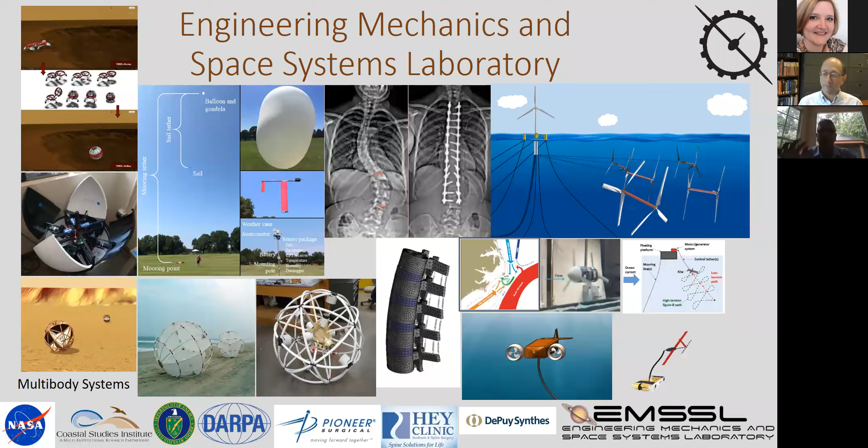So just a brief outline of the talk. I want to go over a brief introduction to multi-body dynamics. Then we're basically going to start in space with space tethers. Then we're going to move into the upper atmosphere and talk about trajectory control systems for scientific balloons. Then we're going to move down to the ground and look at bio-inspired rovers for surface exploration. And then we'll finally end up in the sea. So we're going to go space, air, earth or ground, and then sea.

That'll be kind of the trajectory. I'll spend about half the talk on these first 3 topics, and the last half of the talk will be on the renewable energy.

Before I start those, I wanted to mention that we have an effort going on in modeling of the human spine and surgical instrumentation through these long surgical contracts, trying to figure out ways we can help use finite element analysis to help surgeons have their patients avoid situations where the rods used to straighten up the spine break. That's really a topic for another talk, but I wanted at least to mention that we do that work here.

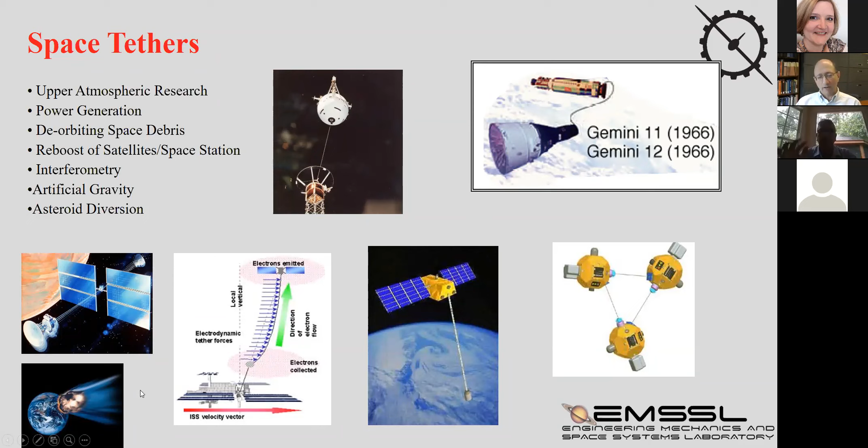But what I'm going to focus on here is some work we did where we looked at asteroid diversion. Most of the work here was done by a student who was on an Air Force fellowship. He came here to get his PhD, David French, and he did some really, really nice work. I'm going to be presenting a lot of the work we did when he was here.

Okay, so let me talk a little bit about just what a NEO is. It's a near-Earth object. It could be an asteroid, could be a comet. They're sometimes called PHAs, or potentially hazardous asteroids.

But I want to show you just a couple of reasons why people are concerned about near-Earth objects. So as anybody who likes dinosaurs knows, the Chicxulub crater, about 65 million years ago, it's believed that a large asteroid struck here in the Yucatan Peninsula. You can see the satellite image of the crater, and it basically caused worldwide species extinction.

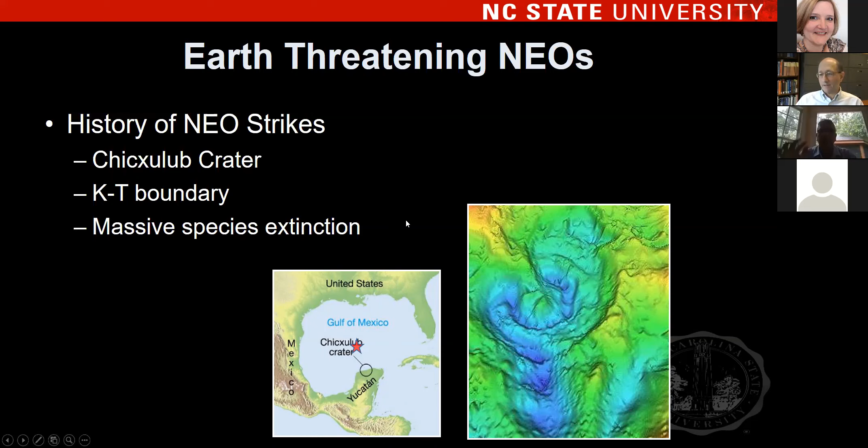But on a more recent event, I think this happened in 1908, the Tunguska event. There was a massive event. It could have been an asteroid, it could have been a comet burst, happened over Siberia, and it just devastated a whole region. But fortunately, it was an extremely lightly populated area, so really, it had very little impact.

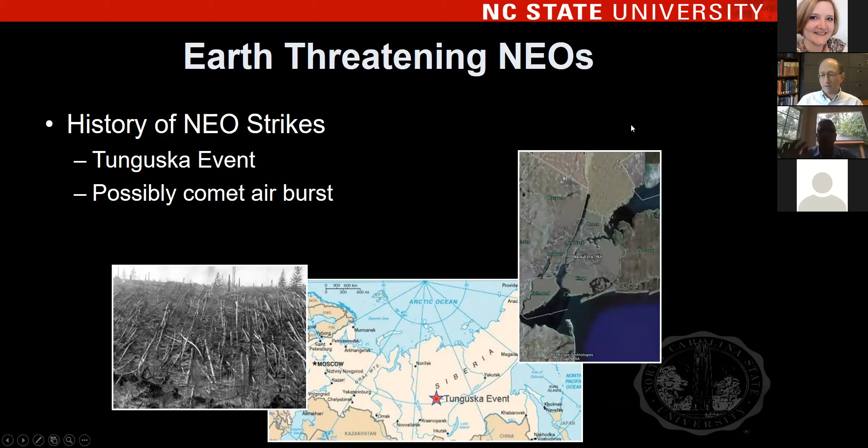But I want to show you here. This is a picture of New York City, and if we overlay the Tunguska event on top of that, you can see that had this event happened over New York City, you probably would have lost a lot. And that's in fairly recent history.

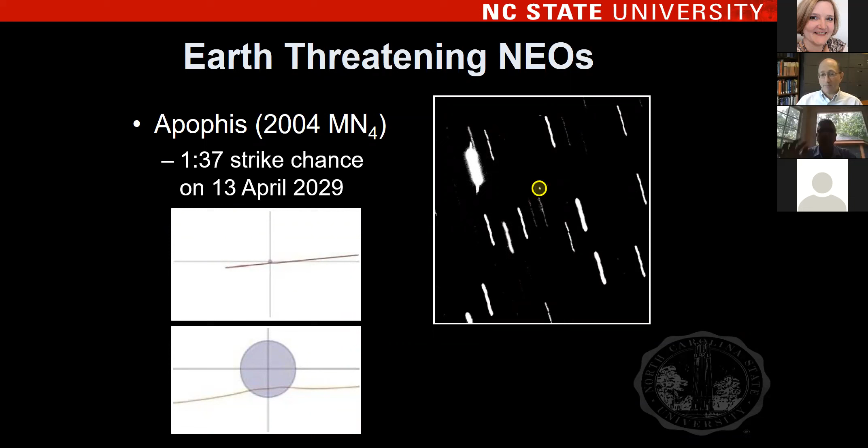So fast forward to 2004, NASA came out and said there was a 1 in 37 chance that an asteroid was going to strike the Earth in April 2029. That kind of got people's attention. The next day they came out and said, oh, we made a calculation error, it's only 1 in 45,000. So people were able to breathe a sigh of relief there.

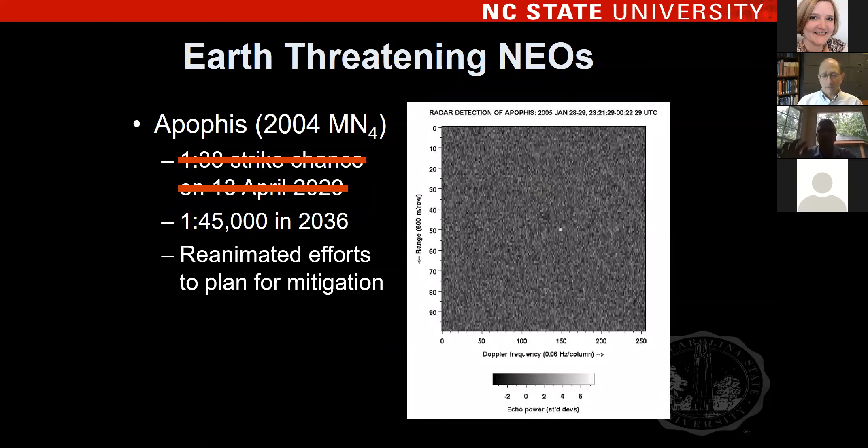But it did kind of reanimate efforts to plan for mitigation. And basically, NASA did two things. One, they started using satellites and developing satellite systems to try to detect potentially threatening near-Earth objects. And they also started looking at mitigation techniques.

So some of the techniques, and I want to show you these just because they're all what I would call extremely challenging, and you could almost say far-fetched. I want to show you these just because ours is probably equally challenging, but it's really kind of in the same neighborhood in terms of difficulty.

So everyone talks about blowing up an asteroid. Well, you can't really blow up an asteroid, but what you can do is detonate a nuclear device near the surface. It creates a shock wave then, which takes part of the asteroid.

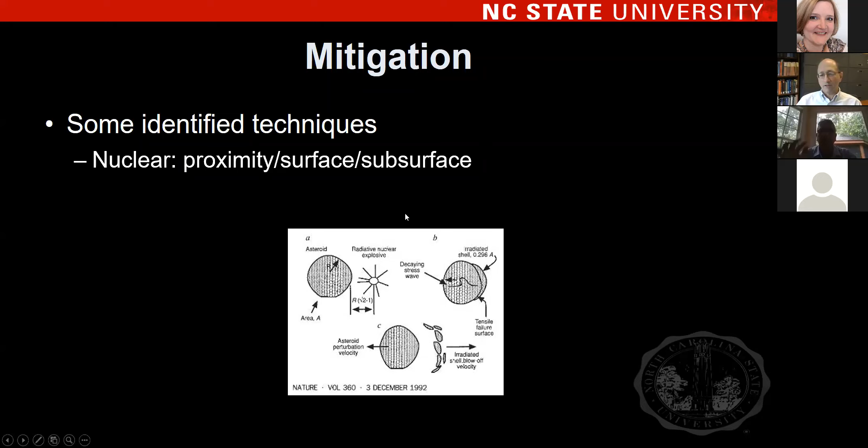The pieces will explode and break off and travel in one direction, and so you'll get a reaction force on the asteroid which can change its orbit. Then some people say, well, let's find an asteroid going the other direction and somehow steer it so the two of them hit each other and collide.

You can land on the asteroid, try to despin it, and then fire a rocket engine to gently push it off course. You can use a gravity tug, where you orbit a large satellite nearby and use the gravitational force between them to gently tug it off course.

Some people say you should paint half of it with some kind of thermal coating so that you have an uneven thermal emission, which would change the radiation. That's something called the Yarkovsky effect. I'm not a thermodynamicist, so I can't really talk too much about how well that would work.

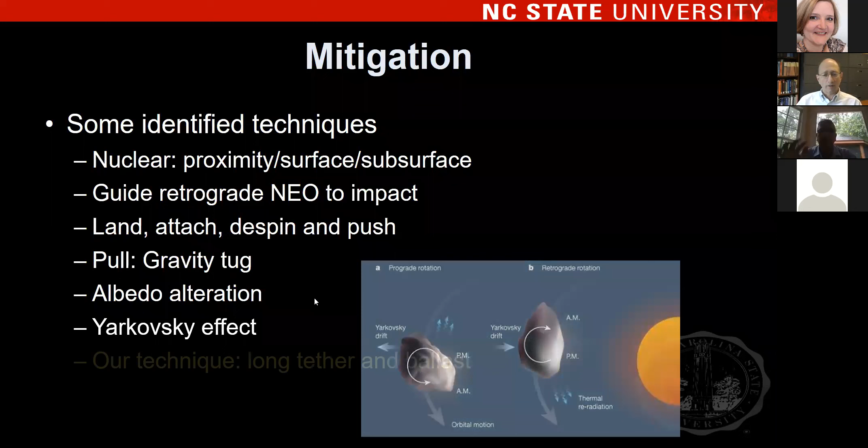And then our technique is to use a long tether and ballast. Okay, so here's the situation. You have an asteroid with an Earth-crossing orbit, and the idea is you don't want Earth and the asteroid to arrive at the intersection of those two orbits.

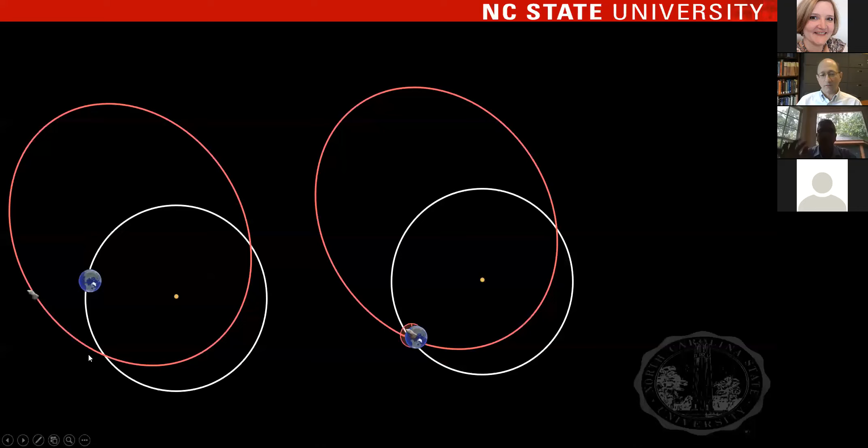So what you want to do is, if you know that in 5 years, 10 years, whatever, this asteroid is going to be hitting the Earth—they're both going to be here at the same time—you want to somehow alter the trajectory of the asteroid so that doesn't happen.

So what we've been proposing is you basically attach, with a tether, a long ballast mass. It could be a spent booster rocket. We've been looking at masses on the order of about a Saturn V rocket attached to a long tether.

And what you do is you change the center of mass of the system, so now it changes the orbit. And when you change the orbit, hopefully instead of this asteroid hitting the Earth, it's actually moving slower or faster at that point, so it's missed. Well, I should just say the orbit has been changed such that they don't arrive at the same time anymore.

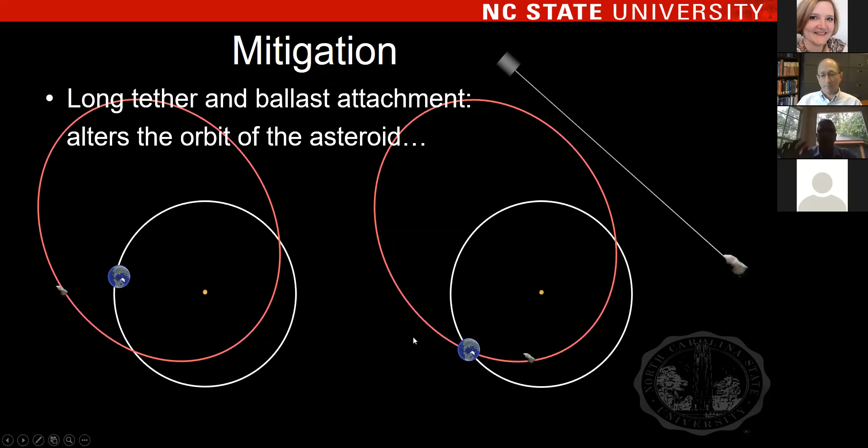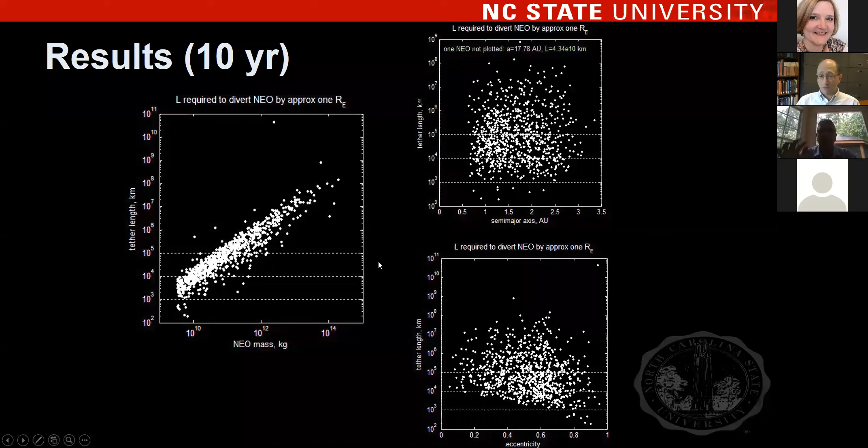But let me show you an easier to understand plot. This is a plot of all the known asteroids that have Earth-crossing orbits. On this axis we have the mass, and this we have the tether length. Basically we're showing which of these asteroids can be diverted by a given length. So you see that if you have a tether length of about 100,000 kilometers—which is basically the length of the proposed space elevator that NASA's been looking at—you can actually divert about half of the known Earth-threatening asteroids.

Okay, so just want to say, basically we've added a method to the arsenal of things that people are looking at. Hopefully we won't have to actually consider this for real for hundreds or thousands or millions of years, but we had an event like this just 100 years ago. So, we got about a dozen publications out of this work.

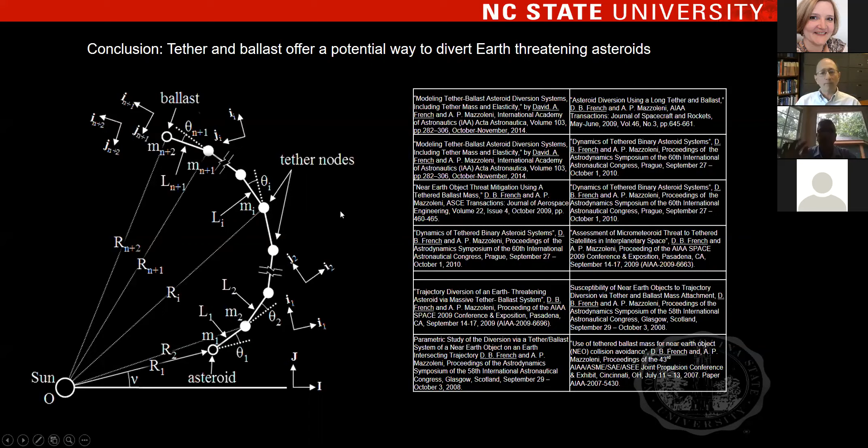Okay, so the next thing I want to go through, and I'm going to go through this very quickly, and I apologize to the students involved, but I want to make sure I have plenty of time to talk about renewable energy.

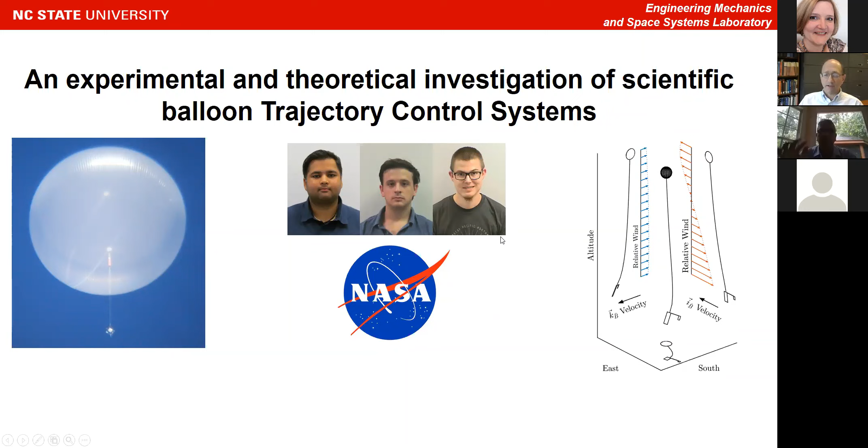This is the trajectory control system for scientific balloons. The lead people on this are Saurabh Agrawal, a master's student finishing up this fall; Chris Yoder, a PhD student finishing up this year, who's currently a Pathways intern at NASA's Balloon Programs Office working on this problem for NASA; and Garrett Moats, who just graduated this past spring and is now working on renewable energy for Sandia.

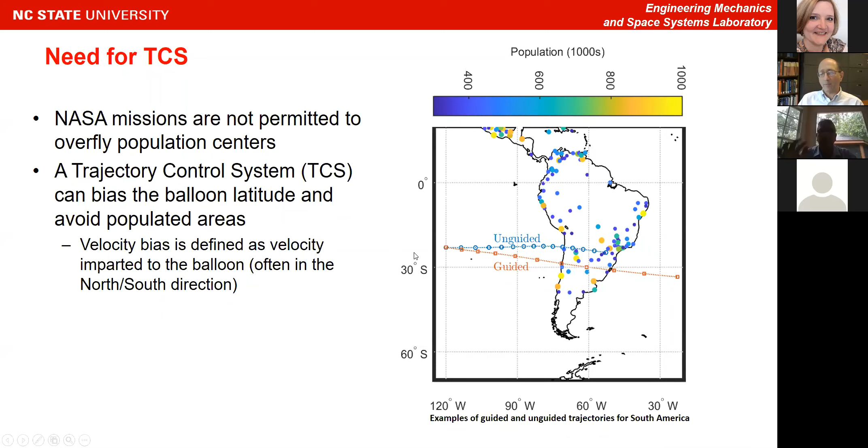So here's an unguided path of the balloon that goes over a populated area over South America. They would much rather be able to guide it so it goes over a more lightly populated area, and there are three ways they're looking at doing that.

One is you can lower and raise your altitude by inflating and deflating your balloon, and then catch various air currents to move around. Then you could attach a propeller system, or you could do a long tether and a sail.

They all have strengths and weaknesses. The propeller isn't going to work very well at high altitudes. The altitude-modulating system requires having the appropriate wind speeds at the altitude you need them.

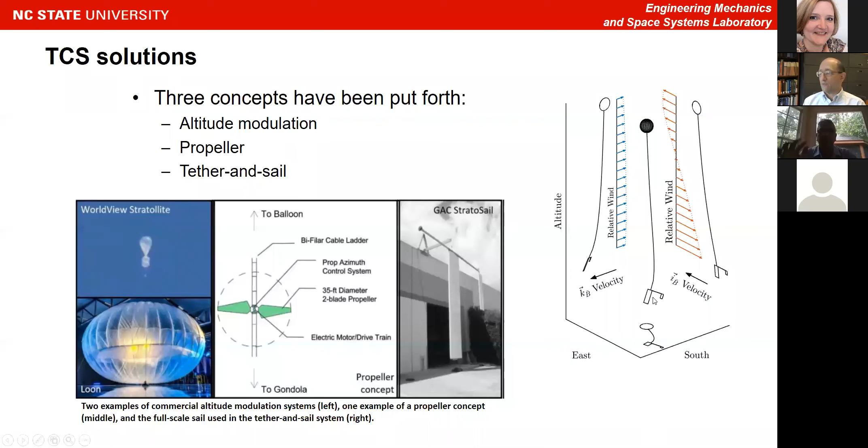Now the long tether and sail, the way it works is you suspend this tether with an airfoil, maybe a 10-kilometer long tether. The whole system basically moves at the speed of the balloon, but the wind speed down here in the denser atmosphere is different, so you're dragging this airfoil through the atmosphere. Since it's at 90 degrees to a traditional airfoil like on an airplane, the lift generated will be sideways, and you can use that to control the trajectory of your balloon.

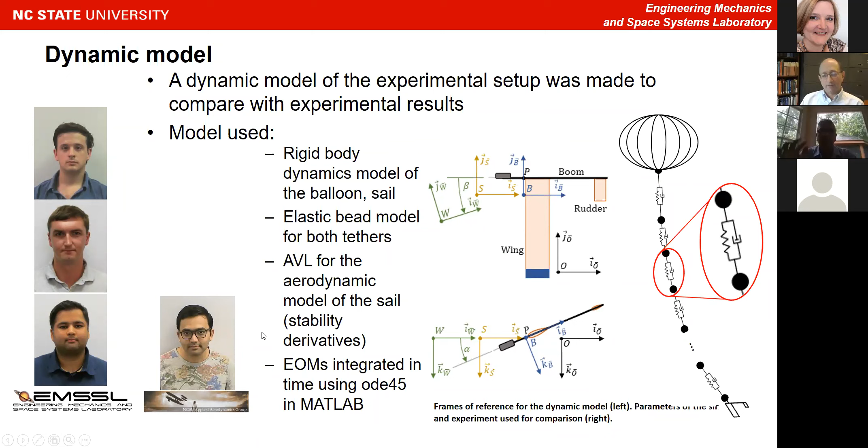So we created a dynamic model of the system. You can see over here our tether model. I want to point out that Tom Gemmer also helped us out, and Raj Waghela from the Applied Aerodynamics group, Dr. G's lab at NC State, also helped with the dynamic model.

We also did some experimental work here, and Maria Ailman, also from Dr. G's lab, helped out with that as well.

Very simply, we've done modeling results and experimental work, and so far it looks like the model and the experiments agree. We have about 6 publications to date on this, and what remains to be done is to compare the three methods.

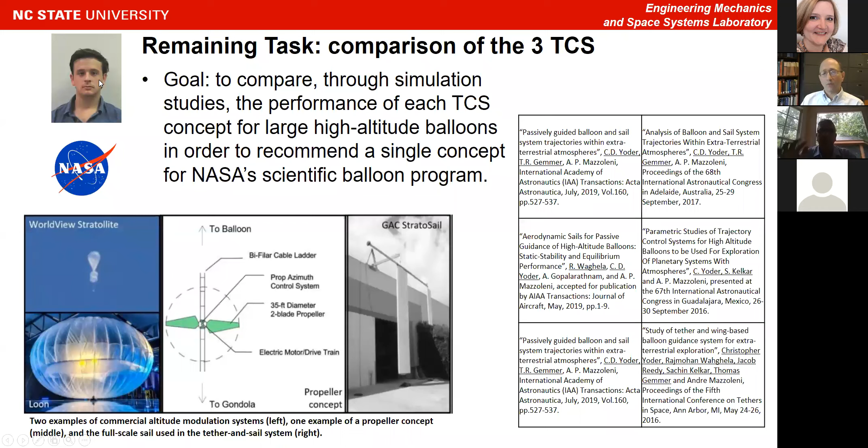NASA already had models for the two other systems, and now we have a model for the tether sail. Chris is currently working on that, and we'll wrap it up this year.

Okay, so now I want to move on to bio-inspired rovers. We've been in space, we've been in the air, so I want to talk about applying multi-body dynamics analysis to ground-based systems.

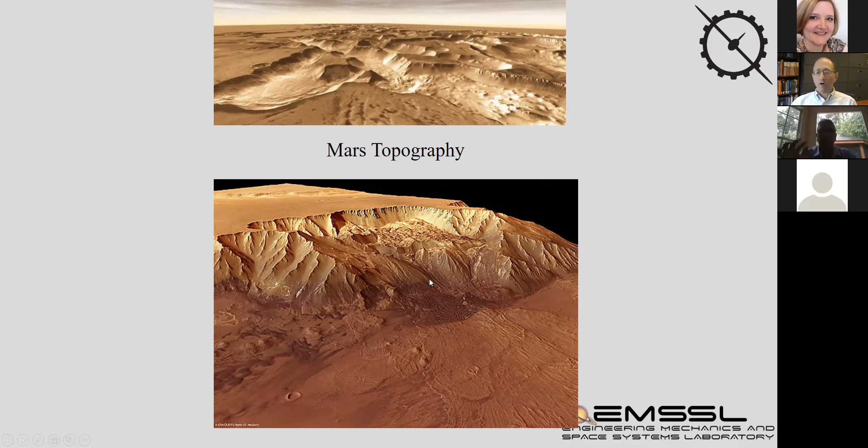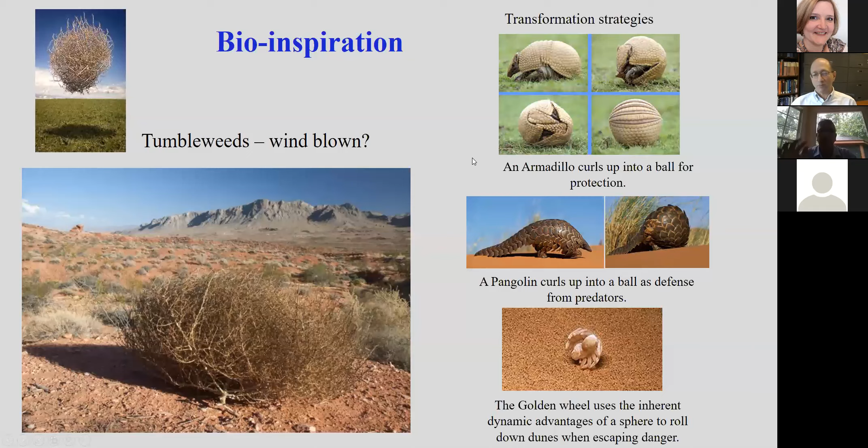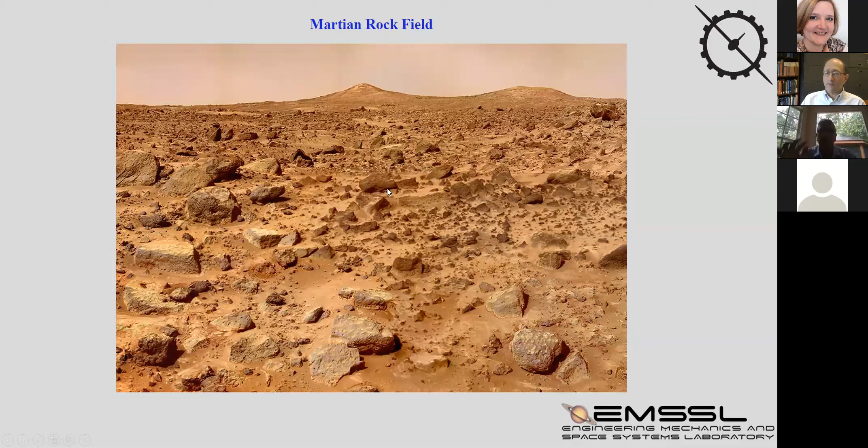We used Kane's equations for this model. One of the things is that these rovers are going to be moving through rock fields, so that was a very important part of the modeling effort.

So what we did was we looked at the Viking data to get a distribution of the rock sizes, what the rock sizes are and how they were distributed throughout Mars. Then we generated random rock fields so that we could do Monte Carlo studies.

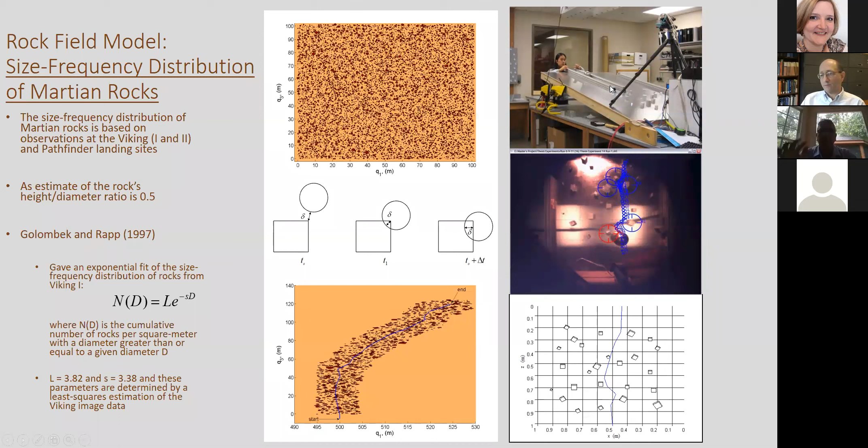Here you can see we did some experiments where we validated our model by rolling some spheres down through a simulated rock field, and we compared those to validate our model.

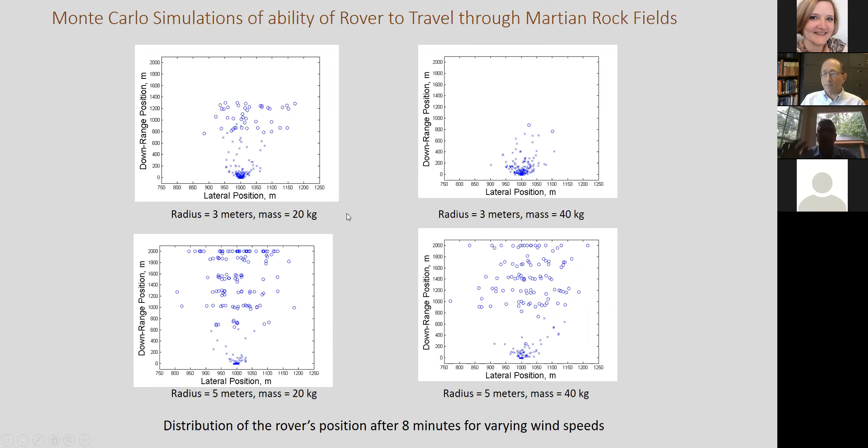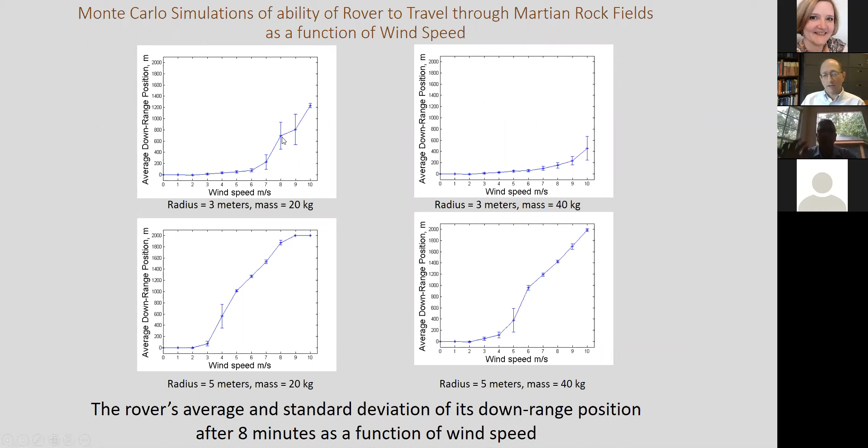You will notice that some of them actually got stuck near the beginning of the simulation. They end up being wedged between two large rocks. So these are the type of studies you can do with a model like this. These are just some results looking at the average downrange position as a function of doing these Monte Carlo studies. You can see these error bars here because of the fact that we did multiple studies.

And what we'd like to do now is we don't want these things just to be blown by the wind and go wherever the wind takes them. We'd like to be able to control them. So what we've been doing is looking at whether, by moving masses around inside the structure—here's one obviously without the sails on it—we can, by changing the center of mass dynamically, actually steer this thing.

And here's a simulated rover. Here you can see it kind of going and steering around some of these craters and hills and so forth. Ashwin and Sri Chakra have been building this model and are currently working on that.

Okay, so let's move on to the Transforming Roving Rolling Explorer, or T-Rex. This is based really on the golden wheel spider, which is a spider that crawls along ridges on sand dunes. If it sees a predator, it curls up into a ball, actually more like a wheel, and rolls down the hill. Then it stops and goes about its business on 8 legs.

So you can see here we wanted to build a rover to do the same thing. The rover can move around on nice flat areas. If it wants to travel down rough terrain, like a hill or down into a crater, it can transform into a ball, roll down the hill, and then go ahead and transform back into a traditional rover. Now, one thing we'd like to be able to do is control the rolling motion.

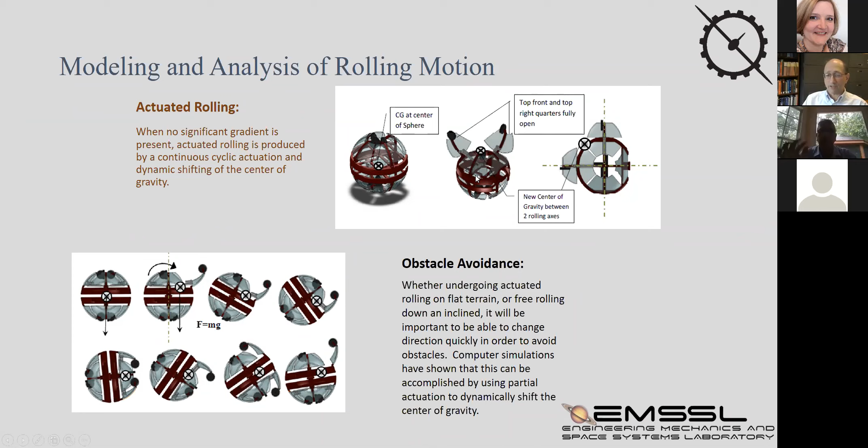And one way you can do that is, since you have these 8 panels that are folding up anyway to form the ball, can we partially fold out those panels and change the center mass of the rover and therefore change its direction? So here's the dynamic model.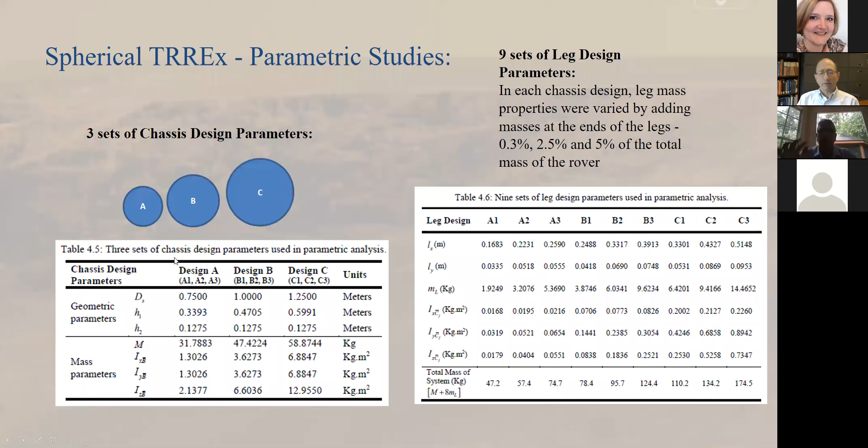So one of the things you can do with a model like this is do some parametric studies. We looked at 3 different chassis sizes, and we also added some masses at the end to increase the moment of inertia. So we looked at 3 different chassis and then 3 different mass sizes at the end, for a total of 9 parameters.

And we also looked at 6 different terrains. Terrain 3, I think, is very loose, sandy soil, and terrain 4, for example, is kind of hard, rocky terrain, and then everything in between there.

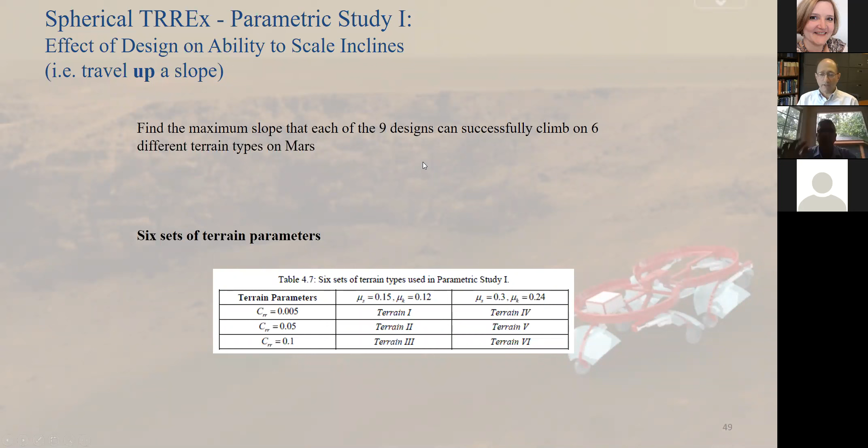Let me just show you a video of what this looks like. So this would be, we're trying to see with this rover, if we had to move up a slight slope in order to get to the edge of a crater to go down into it. And you can see that this rover design does quite well.

But let me show you one where it doesn't work. Here's one where the rover stalls. You can see the panel opens up, it rolls forward a little bit, the next panels open up to try to move it forward, and you can see then that it basically stalls out.

And then here's one where the soil is just too slippery for the given slope, and you can see it basically just keeps slipping.

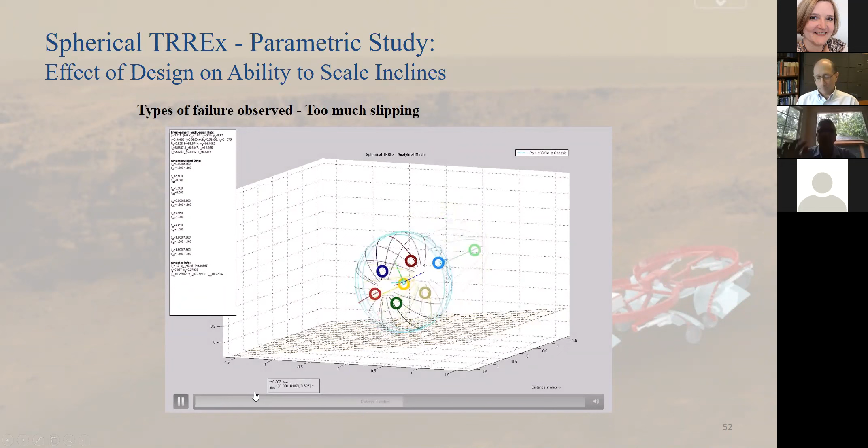Okay, so we wanted to see what's the ability to scale inclines, and basically we said we have a successful climb if every time the rover spins once about its own axis, it climbed at least 25% of what its circumference is. So you take basically the 2 pi r, and if every time it turns around once, it's gone at least 25% of 2 pi r, we consider that to be a successful climb.

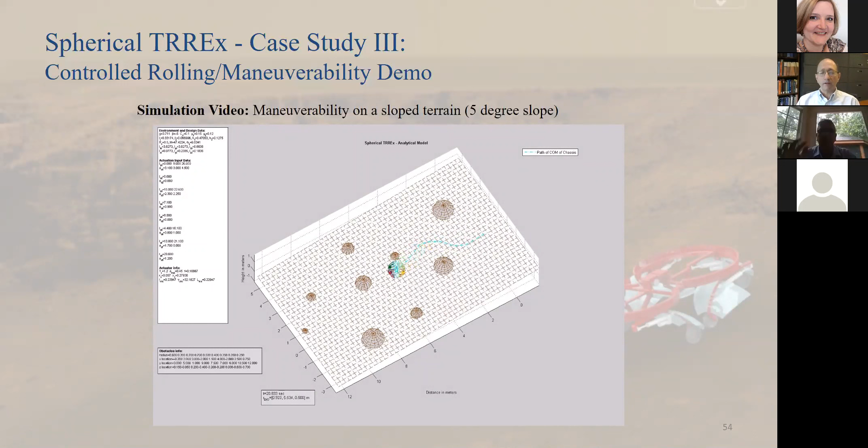Here I want to show you a simulation where you can see the rover, if it wants to avoid these obstacles, it can do this by strategically opening and closing its panels. You can see it, at least in simulation here, it does quite well.

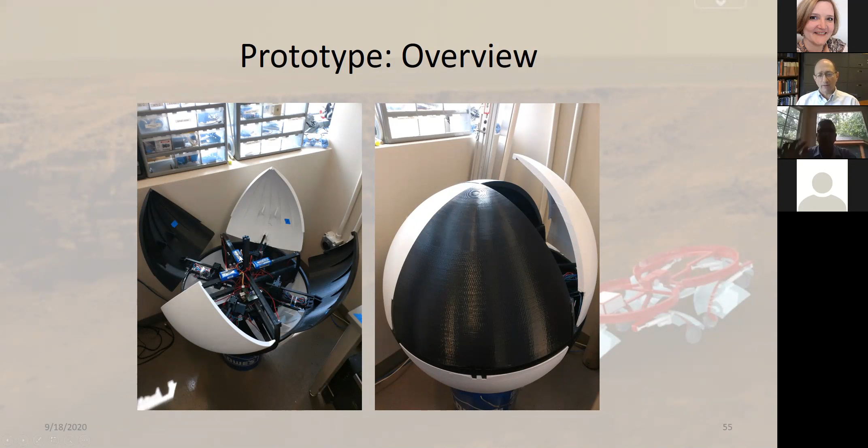Okay, so the next thing we wanted to do, and we just recently started this actually, and this is work that we were able to do some testing on before COVID shut everything down in the spring. But here you can see we've actually built this prototype. You can see the inside of it with the motors and the microcontrollers and so forth.

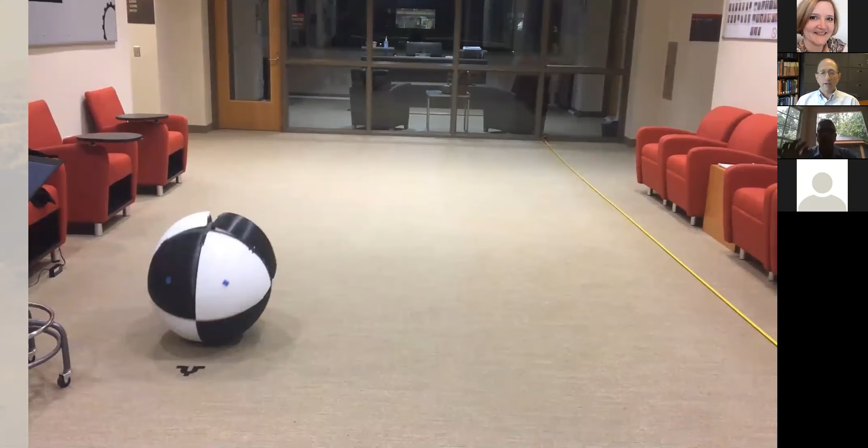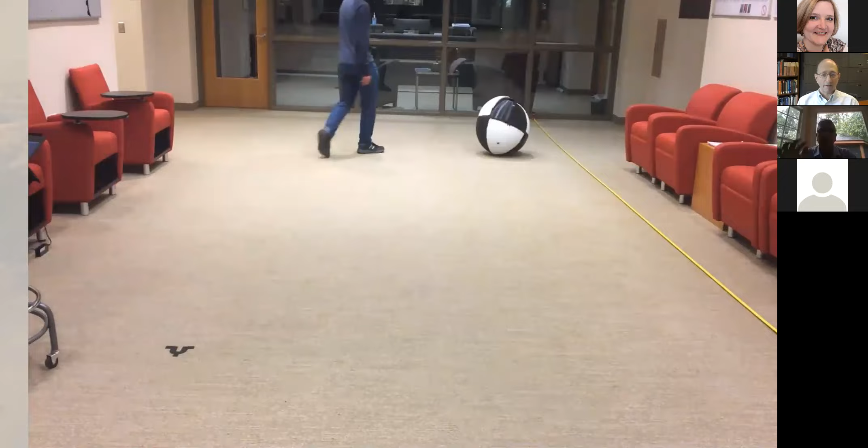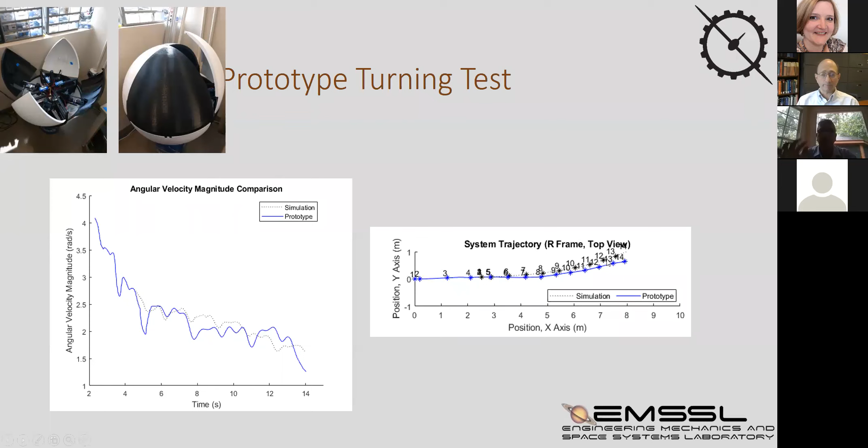Okay, so between the rover, the tumbleweed, and the T-Rex work, we've got about a dozen publications out of that. We're also looking at some Earth applications of all these technologies. The NSF just started a new program called Foundational Research in Robotics.

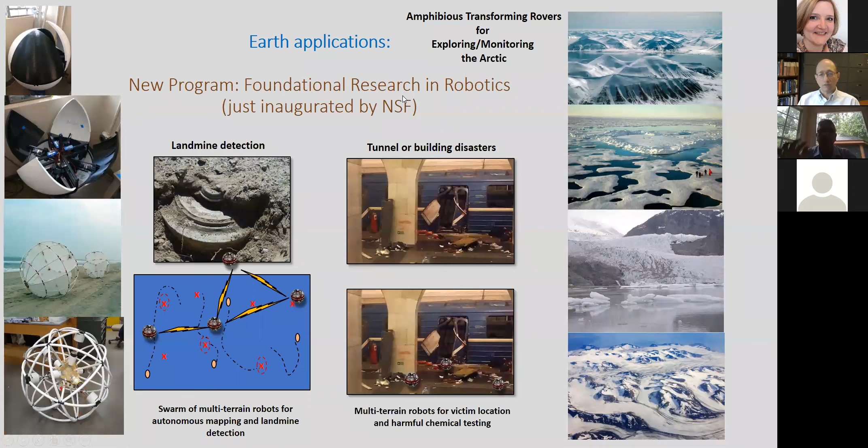We're also looking at amphibious rovers that can do things like landmine detection, disaster relief scouting, and exploring the Arctic, because it has very rugged terrain. You need to be able to move on ice and sand and in water, and even beneath the water. So we're currently preparing a proposal to go to this brand new NSF program.

Okay, let's move on now. I'll spend about the last 20 minutes of the talk on renewable energy in the Gulf Stream, and you'll see that all the techniques we used to look at this, we already had expertise in from those other three research areas we've been working on.

Here you can see the Gulf Stream, this high speed flow in red, goes past the coast of North Carolina. A great source of energy, gigawatts of power. However, that high speed flow of 1 to 2 meters per second is about 3,000 meters deep.

For scale, this is the new World Trade Center, you can see it down here. So you can see just the challenge. There's no way you could build a tower turbine system to put the turbines up at that depth.

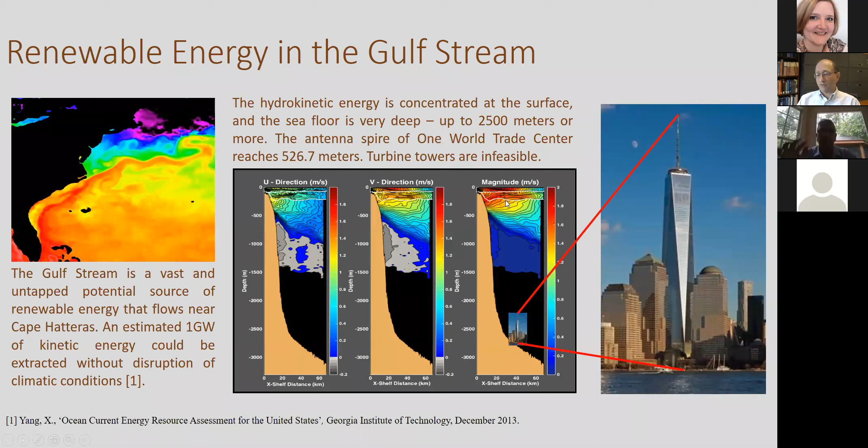So the solution is to have a tethered system. Let's take a look at some of the solutions. I know this is a very busy slide, but we've got a very large effort in this area going on at NC State, so I want to spend a little time talking about that.

It actually dates back to when Dr. Vermillion was still at UNC Charlotte, and we'd both been doing work for Coastal Studies Institute on different projects. Mike Muglia at the Coastal Studies Institute contacted us with an idea to tether a turbine system in the Gulf Stream that could collect energy through the tether, store it with batteries, then drive to shore, offload the energy, and drive back.

It turns out you just spend too much energy going back and forth to make this practical, but we learned some really good things there.

This ended up leading to, when Dr. Vermillion came here, we submitted a proposal to the Department of Energy along with University of Maryland and Florida Atlantic, and also with Dr. Granlund's lab involved, for this kite-based system for extracting energy, which you heard a lot about two weeks ago in Dr. Vermillion's talk. About the same time, our lab was working with Dr. Granlund's lab and Dr. Bryant's lab on another project looking at coaxial turbines in the Gulf Stream to collect energy.

After this DOE project came along, all five of these groups joined forces: Dr. Vermillion's lab, my lab, and Coastal Studies Institute with Mike Muglia.

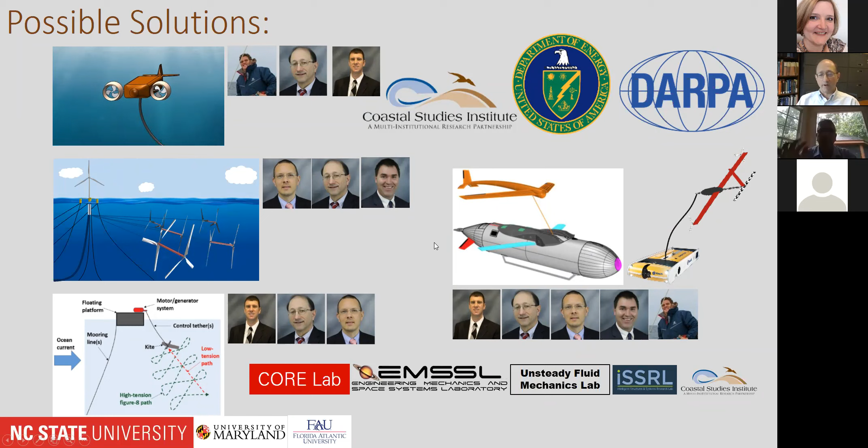I'm going to focus the rest of the talk mostly on this project. I'll talk a little about the DARPA project and the DOE project, but very little, because otherwise we'd be here for about two hours.

These are four PhD students I have working on this. Sumedh is working on optimal kite design. Joey is working on tether deployment and reel-in modeling. Ashwin just joined the group, and he's going to be working on pool-based and open water tow testing.

Sumedh is also working with Dr. Vermillion's student Kartik on design optimization tools for the kite. Joey is working on reel-in dynamics for the DARPA project, but also has application here for the DOE project.

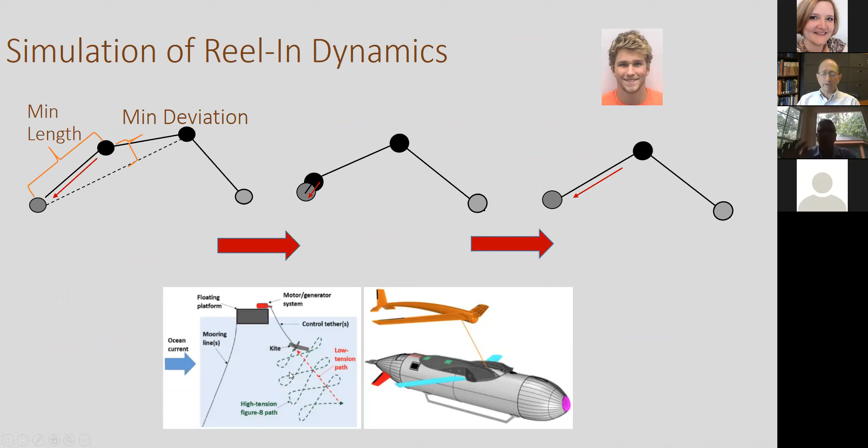Here you can see what one of those simulations looks like, this is just an animation of some of the simulation work. You see that every time, the first link is the one that shortens in this tether model, and once the link gets close enough, it disappears and we rediscretize the system.

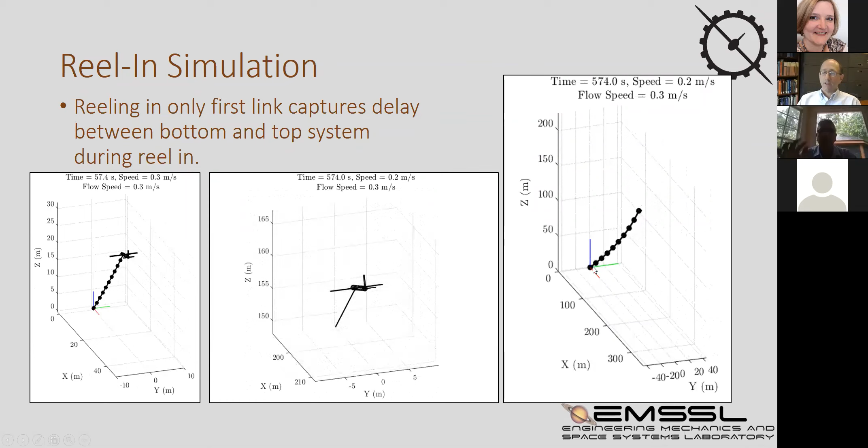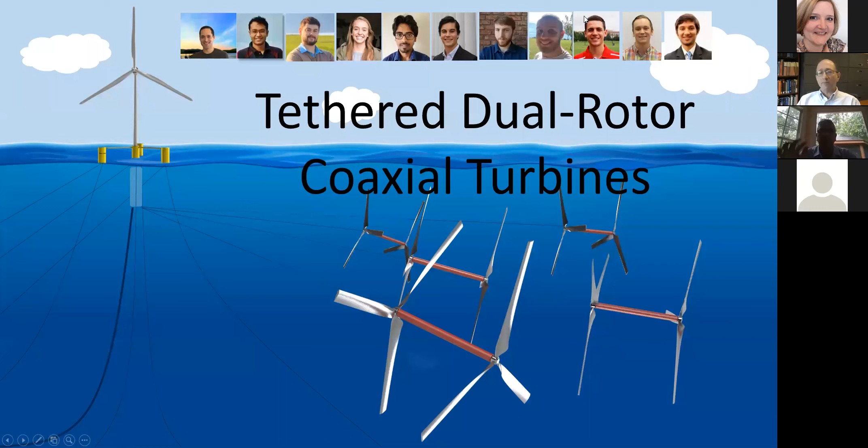Okay, so now let's talk about tethered coaxial turbines for about 15 minutes or so. Here you can see a lot of the people, the graduate students who worked on this project.

We talked about this before—it's not practical to have a turbine in 3,000 meters of water, so you have to have a tethered system. A single turbine is not going to work because you don't balance the torque. You have to have two contra-rotating systems to work, and there are two ways you can do that: a parallel plane configuration or a coaxial system. It turns out there are some real advantages to having a coaxial system, which we'll talk about.

When you have a coaxial system, obviously you have zero reaction torque, but there are some other benefits. You have counter-rotating turbines, which means downstream of the system you're going to have much less flow disturbance, which is good for marine life and also helps if you have a whole farm of these. We also found that as you bob back and forth in the water, there's much less change in the energy generated with the coaxial system than with the parallel system.

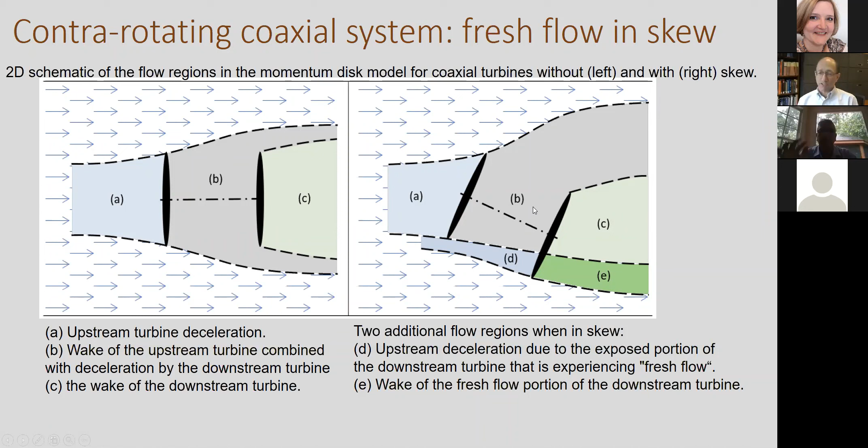One of the interesting things when you have this inclined or skewed rotor system is you have fresh flow that actually reaches the back rotor, which can help improve energy generation. Also, because you have these uneven forces on the front and back rotor, you can actually use that to dictate the depth and position of the system, which is really fascinating.

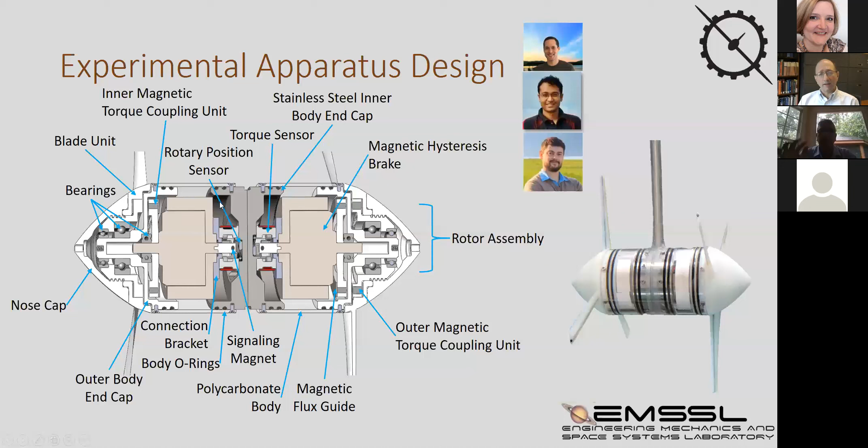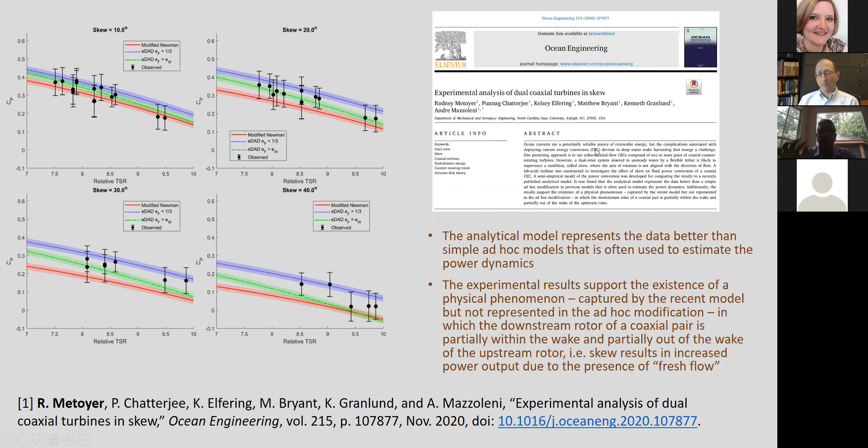One of the things we did is some testing—one of Dr. Granlund's students, Kelsey, worked with Punnag and Rodney on this. We built an experimental apparatus that we tested in Dr. Granlund's water tunnel, and we were able to actually validate Deepak's model there. There's a paper that just came out on that.

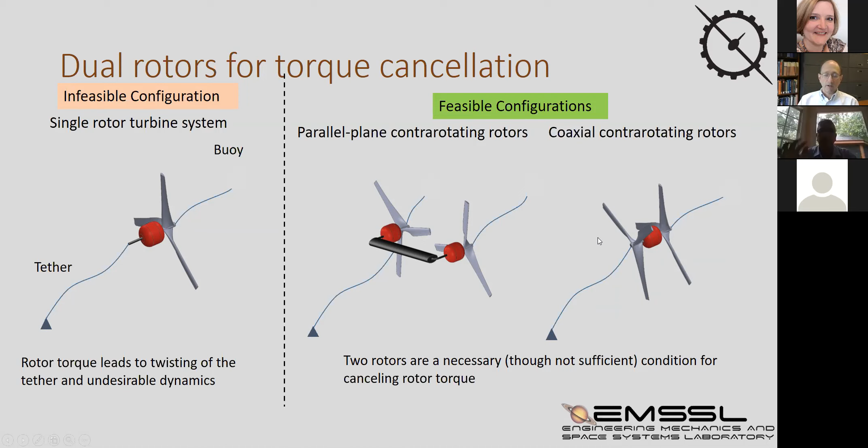Now, the key challenge with this project is calculating the forces acting on the blades. Let me go back to the picture here. As this is moving around and the blades are spinning, the flow—going from left to right—the angle of attack and velocity as it passes over these blades is affected by the fact that the system is skewed, with some blades going into the flow and some going away from it. This introduces a wide variation in the forces acting on this turbine that you don't have if you're just looking at a traditional fixed wind turbine, for example.

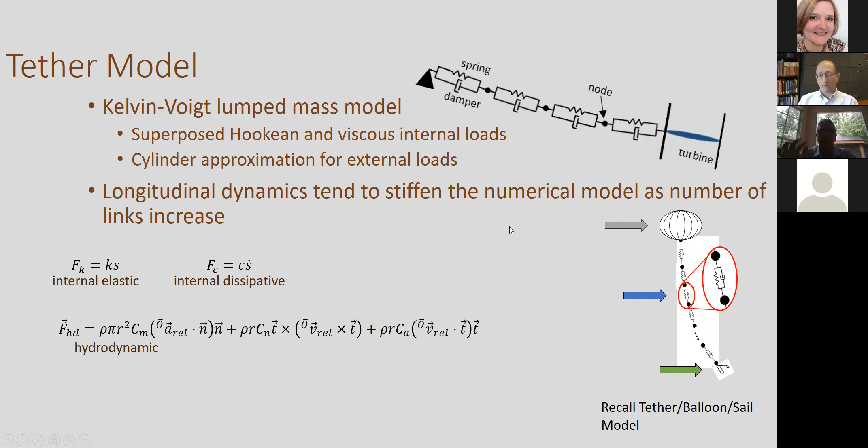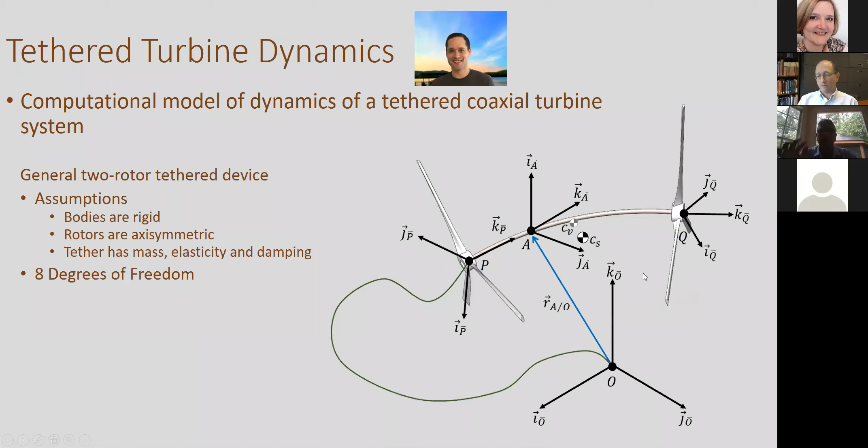We were also able to use a lot of the multi-body dynamics work that we developed for the T-Rex, which went into the dynamic model here. So there was a lot of synergy between these different projects. We do have a generator in the model, just wanted to point that out. So it's a fully operational system that we're simulating here.

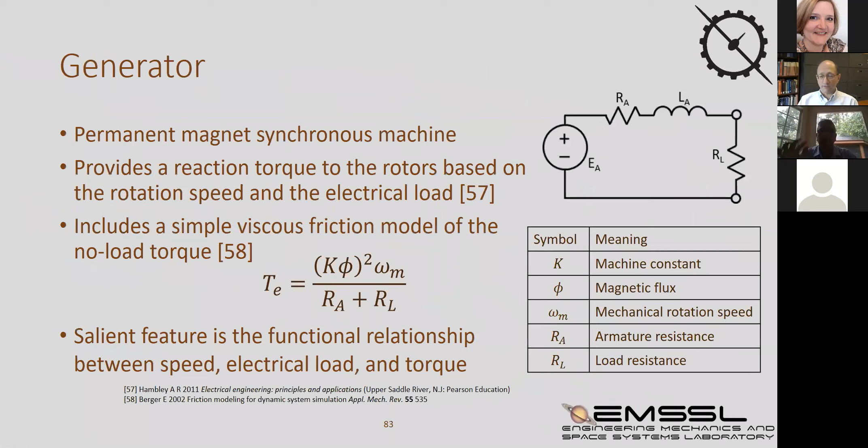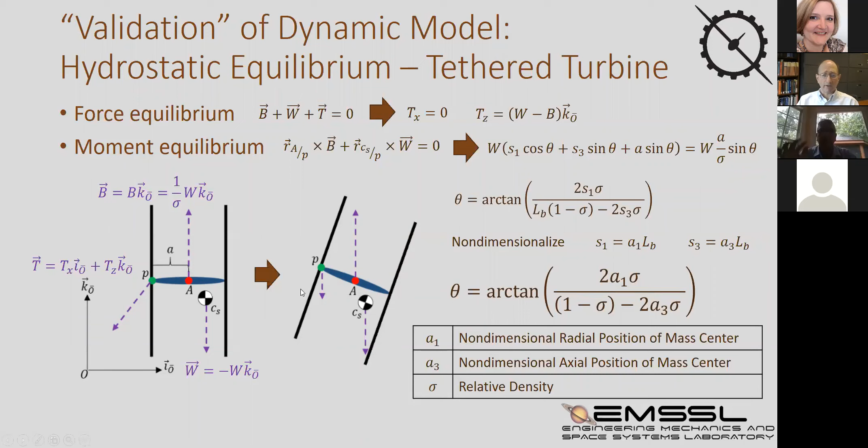Okay, so let's talk a little bit about hydrostatic equilibrium. If you have no flow at all, and you put this thing in the ocean, eventually the buoyancy is going to make these things positively buoyant, because if the tether breaks, we want them to float to the surface. You can see that it would float to the surface and assume a certain position here, and you can analytically calculate what that position is.

What I'm about to show, we're actually using a utility baseline configuration that's 18 meters in diameter. Just for scale, since the NBA playoffs are going on right now, I picked a basketball player here. You can see the size of these things; they're just enormous. But we use all the mass and dimensions for this utility scale.

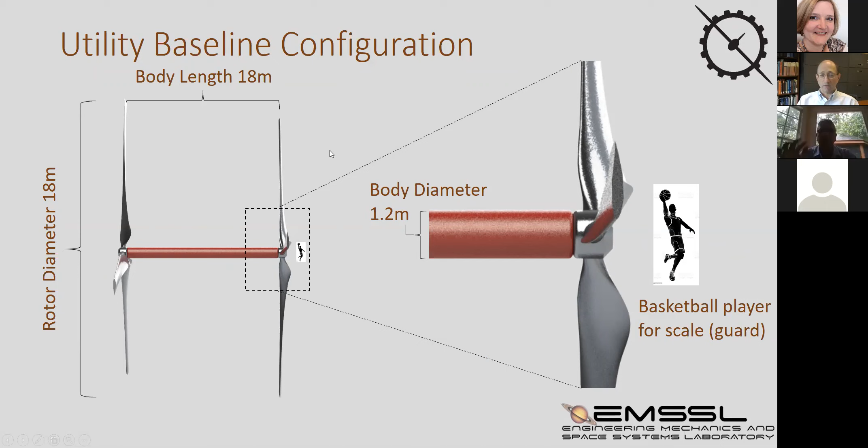What we did was we looked at the dynamic model. We disturbed the system, let it float around the water, and come to equilibrium, and we compared that with the analytical results. What you can see is these dots here are the results of the dynamic simulation. The bars here indicate the oscillation it went through before it settled down to steady state, and they agreed. So that's at least a validation. It's not the validation we ultimately need, which is an experiment, but it at least gave us confidence that we're getting sensible numbers.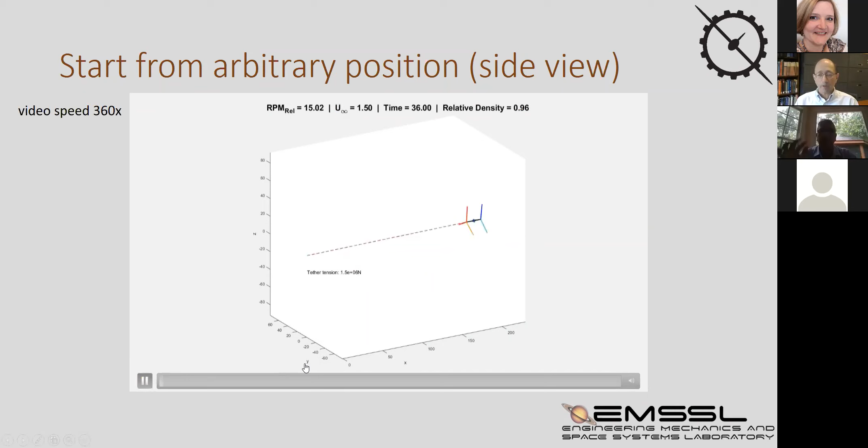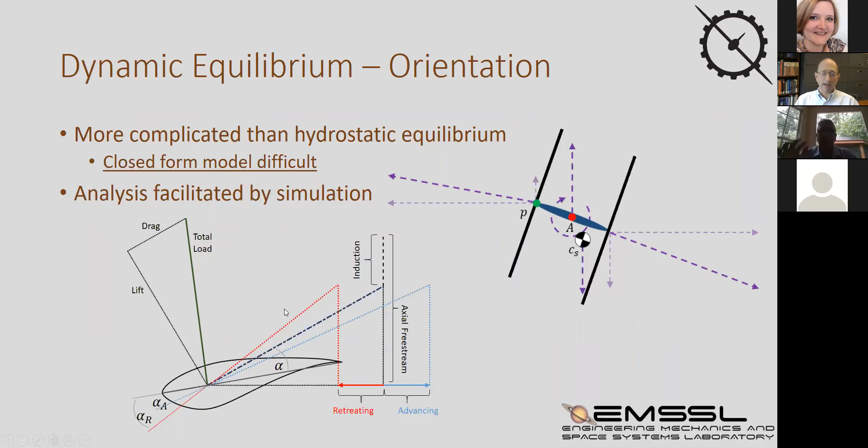Again, just reiterating, the dynamic equilibrium, when you actually have flow, is going to be much more complicated than the static equilibrium, because of the fact that you have these retreating and advancing blades, which change your forces.

Now the question is, can we use this dynamic simulation to find out, by looking at where these turbines go, because we found that depending on the design of your turbine, you're actually going to end up in different drift locations - a kind of left-right horizontal position - and depths. So we want to see, can we use that to design a turbine farm where they could all be attached to the same point? These might be attached to an offshore wind farm, for example, so you can collect energy from the ocean while you're collecting energy from the wind.

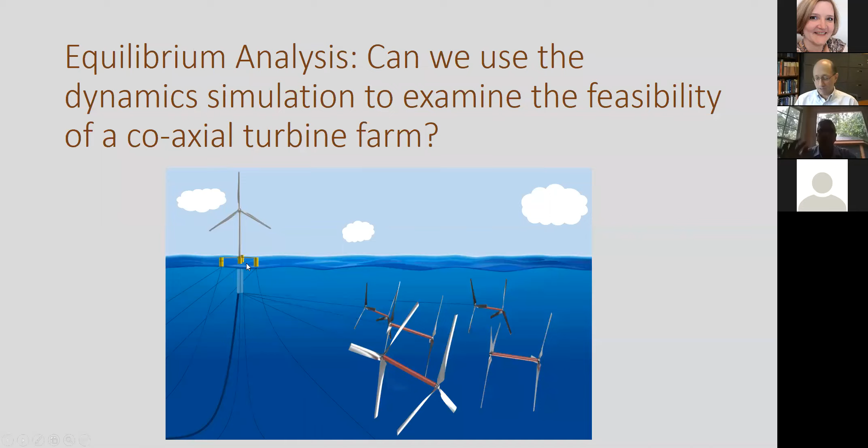Okay, now I'm going to try this. I'm going to try to show you a video here. So I'm going to exit out of this.

Okay, hopefully you can see that. Notice here that these rotors actually start in the middle, and as the flow goes, they move to 3 different positions. This is a top view.

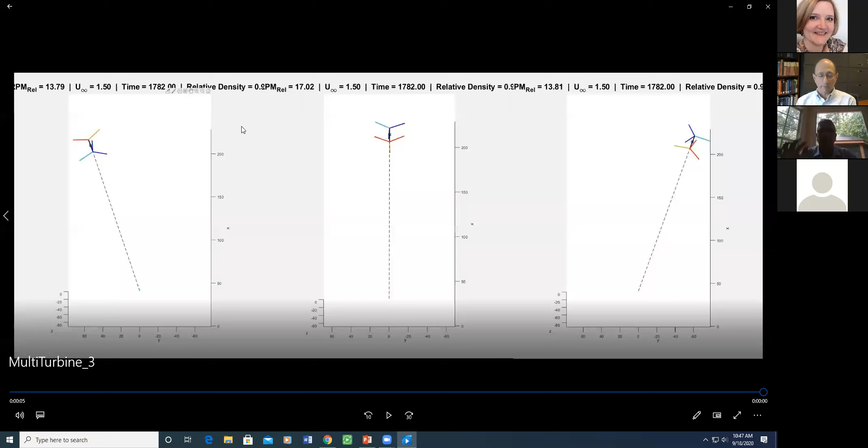The flow is going from the bottom of the screen to the top in all 3 of these cases. But just by appropriately designing the twist of the blades, the location of the center of mass, and other things, our simulations indicate you can actually drive these to very particular locations, which we thought was really interesting.

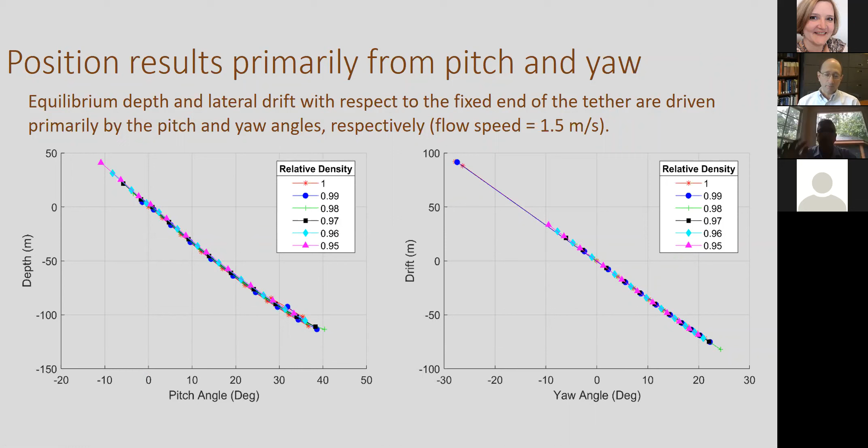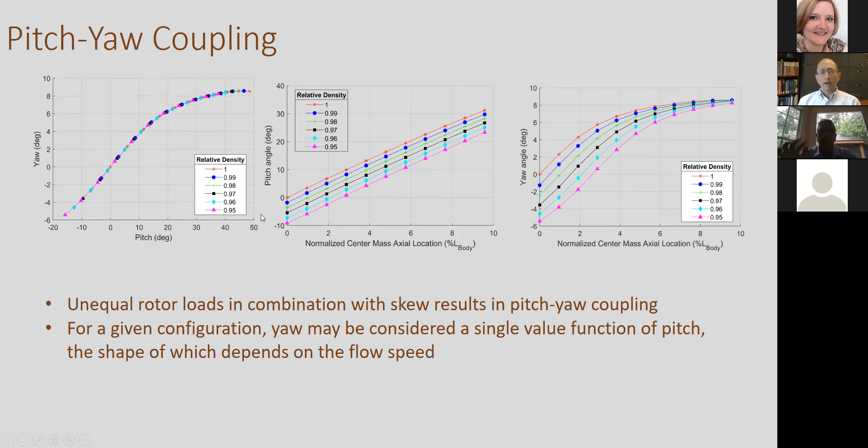Here you can see some plots. I'm going to focus on this one — this is the normalized center of mass location. 0 would be dead center, and 10% would be toward the aft rotor. You can see you can actually affect the pitch angle and the yaw angle by changing the center of mass.

So let's talk about why this happens. When you have these blades moving, with the flow going from left to right, since some blades are retreating and some are advancing, you get different forces on the left and right side of the rotor.

Since this is counter-rotating, it's going to be the opposite on the back rotor. But if the magnitude of these induced yaw moments is not the same, you get a net yaw. Once you have a net yaw, the thrust from the flow acting on the rotor drives it either to the left or the right.

The same thing happens with pitch. If you unbalance the center of mass, you pitch up, and then the net force between the tether and the flow drives the rotor down. So these things are actually positively buoyant, yet because of the tether, they go down to 50 meters, 100 meters, whatever depth you want when in the flow.

I'm going to see now if I can play this other video here. This is a little bit longer. Here you can see the bottom ones are the depth, and the top ones — this one I let run for several hours. This is kind of the interlude, so you don't see all hours of the simulation.

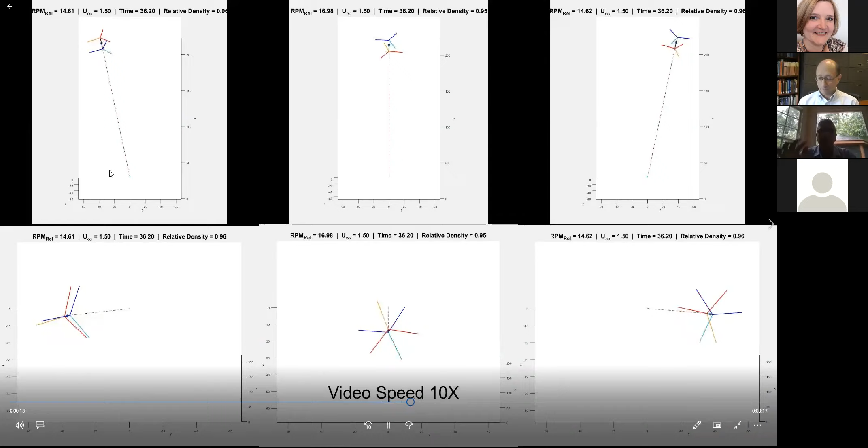We didn't even know that this phenomenon existed before we started modeling them. We started modeling these equilibria and noticed that certain designs, instead of going dead center, started drifting to the left and right and drifting down. Then we realized we could exploit that to create farms of these turbines. So I think that illustrates the power of multi-body dynamics simulations.

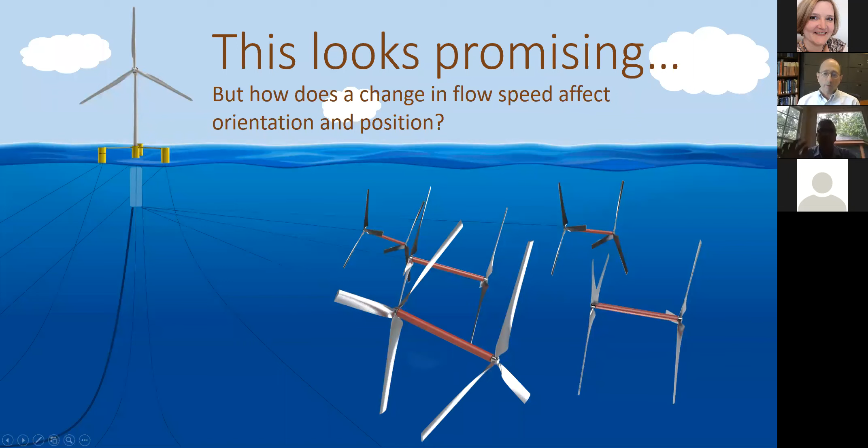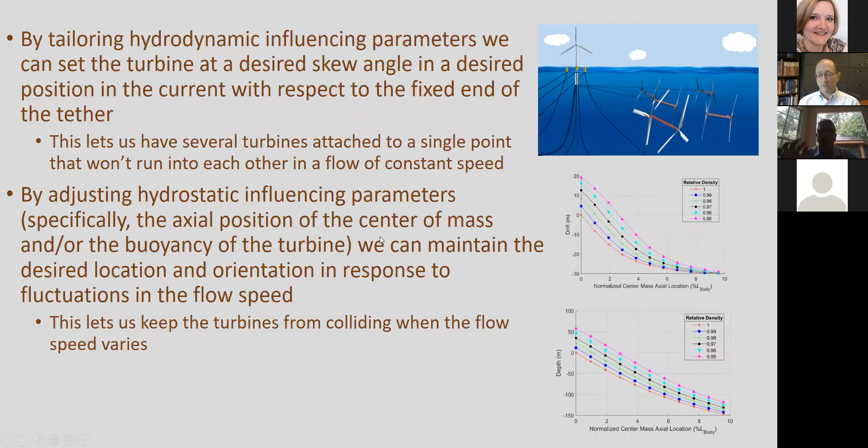We also did some sensitivity studies looking at changes in flow speed. I'll skip through those in the interest of time, but basically the takeaway is that by tailoring the hydrodynamic influencing parameters we discussed, we can set the turbine at a desired skew angle and a given position, drift, and depth. We think this has great potential for creating farms of these coaxial wind turbines.

Next steps: we want to test these turbine systems to see if we observe this effect in the water tunnel. This will be done in Dr. Granlin's water tunnel. We also want to do some basic tether dynamics modeling in a fluid, with a moving tether in a fluid with an end body.

So we've built a water tank in the Engineering Mechanics and Space Systems lab, with some high-speed cameras. We just got this operational about a week ago. Here you can see the system, and the two primary students working on this: Neil Ivankit, a master's student, and Chip Survey, an undergraduate. Let me see if I can get this video to play.

This is actually a tether with a sphere, moving in water. You can see the high-speed cameras here. This is a system we can model, because we have the tether and the sphere and we know its characteristics. We can model what it should be doing in the water, and then compare that, using it to validate some of the tether dynamics models we've been using for this renewable energy work.

To conclude, we've been in space, in the atmosphere, on the ground, and in the sea. I want to emphasize that it's really interesting this project came along, because we had a lot of expertise in the lab from all this other work. We'd often refer to master's and PhD theses done for these other projects, and some students working on this are also working on those, so there's an enormous amount of interchange of ideas between students on these various projects.

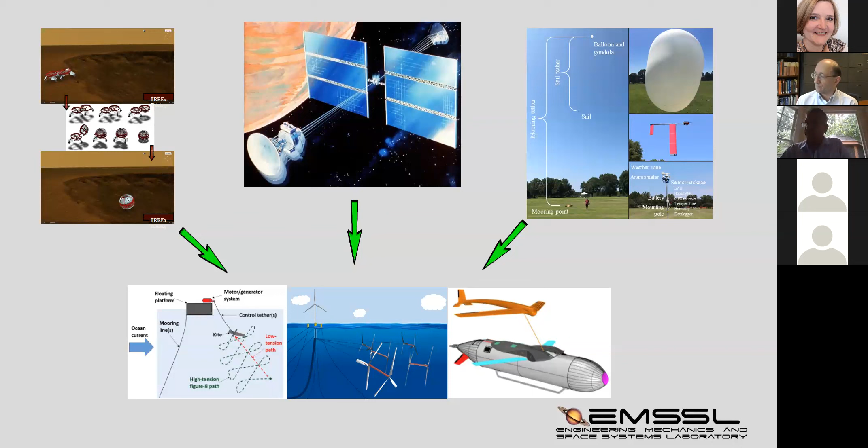Yeah, so let me go back. Based on Rodney's point, I actually had about 10 slides on added mass in here that I took out because I realized we'd be here another hour and a half. But that's one of the reasons we want to do these experiments here, is because we have some added mass models for the tether.

That's one of the things we want to look at with this experiment, because we found added mass models for tethers in the literature, but they only cover the translational loads. They don't include the rotational added mass loads acting on the tether. So thanks for bringing that up, Rodney, because I hadn't mentioned that, but this is a perfect time to bring it up.

So that was another one of the main challenges based on Srina's comment. What happens when you go from tethers in space to tethers in air to tethers in water? One of the things you have to worry about, in addition to lift and drag, is added mass, because the tether is actually moving around, as opposed to being a static tether in a wind field. So you do have accelerations of fluid, and therefore added mass terms.

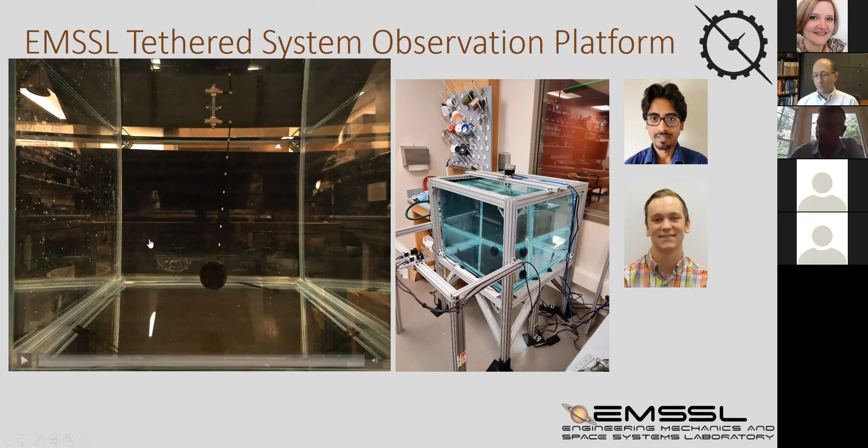Yeah, it makes sense because water is 1,000 times more dense, so it is added mass for sure. Added mass is a huge thing, and we believe we've got that handled, particularly for the turbines. We actually have it handled. What we're working on now is the tether model, and that's the last piece of the puzzle Rodney's working on for his thesis.

I don't want to hog the questions, but does anybody else have any questions? Feel free.

I think Fugo... oh, Andre, yeah, it seems to me you have a lot of activity going on. I have general questions. What's in your mind about research in the last 2 years compared with the previous years?

The last 2 years have really been focused primarily on renewable energy, because the thing I like about it is it's very, very timely, since renewable energy is only going to become more and more important for the world over the next decades. It also uses everything we've been doing on the top. So it's almost like all the work we've been doing over the last 10 years in this space arena.

It's all directly applicable to this tether project. We've got 3 separate efforts going on now, kind of simultaneously, in this renewable energy area. So the bulk of our focus is on this. We're still wrapping up and continuing some of the projects we began before, but the lab, as tradition, has moved heavily in this direction because it actually involves all of the skill sets and knowledge base that we had developed for these other projects.